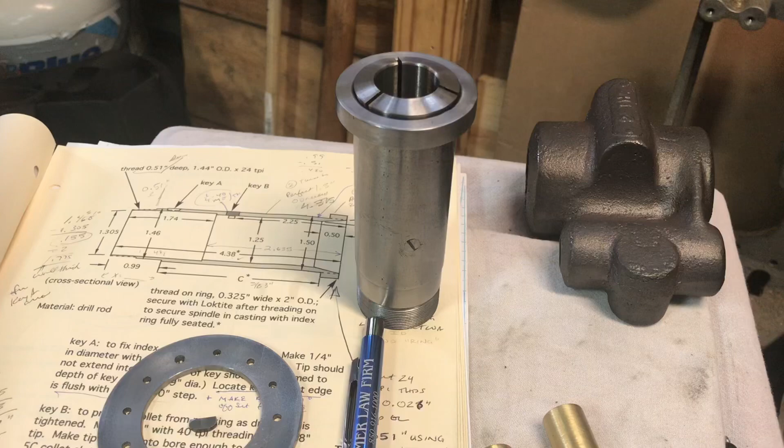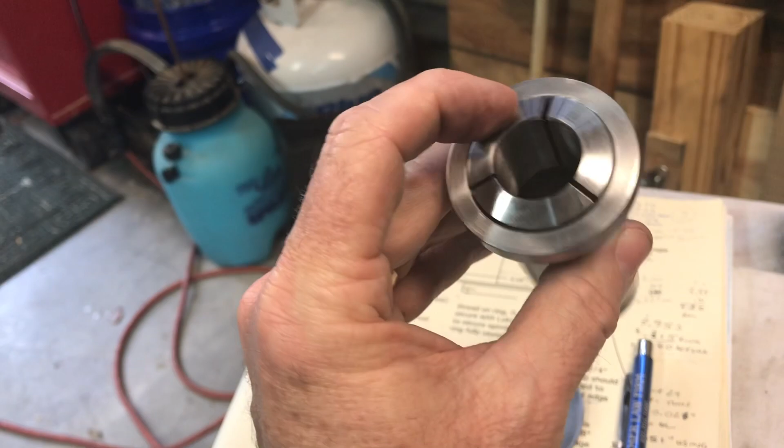Here is the 5C collet or tool holder spindle. I've spent the better part of a week working on this and some other pieces. The rest of this video will be focused on making the spindle. I wanted to show the finished product. Here I've got a 7/8 inch 5C collet in place there, and other things I've made this week.

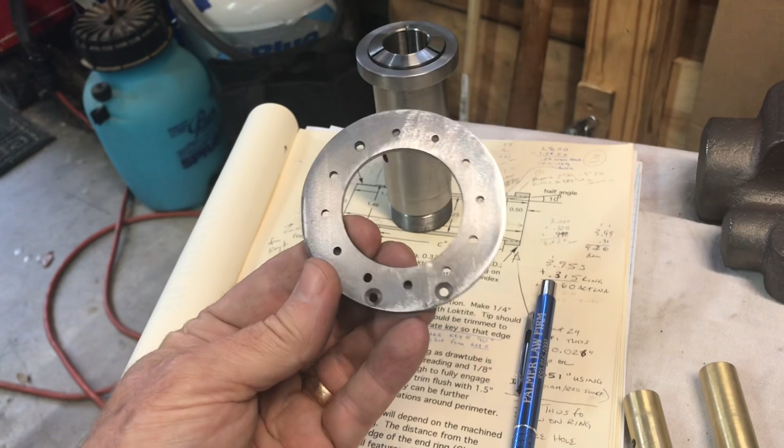Of course, I made the cotters. These are the brass stock, which will become the split cotters for the casting over there. I also made the backplate out of 1/8 inch steel, 1/8 inch thick, and it's 3 inches outside diameter, 1 3/4 inch inside diameter. That'll fit on the back of the casting.

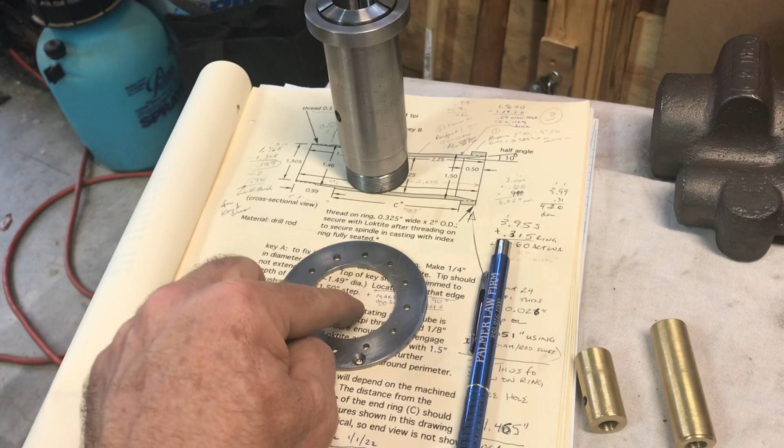I didn't make this, but I modified it. This is a little half moon key that you'll see a little bit later on. I have not fixed that in place yet. In the video, you'll see me talk about, as I get close to the end of the video, when I made last night the little screwed key, if you can see that little 1/8 inch thick key that keeps the collets from rotating.

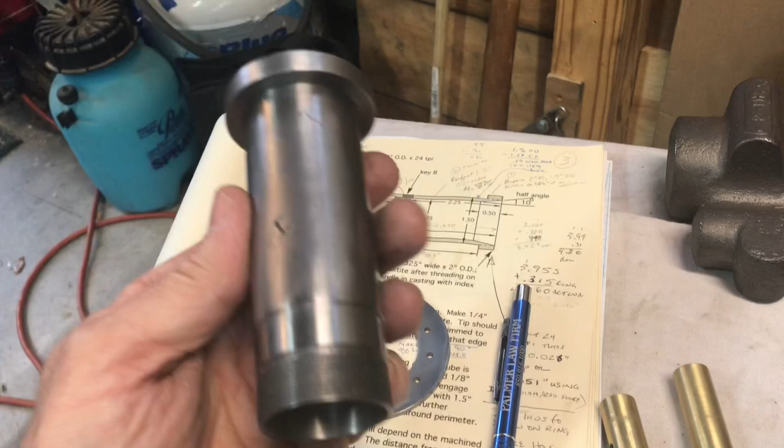During the video, I actually made 2 of these things out of brass first, but they were not a good fit, so I went ahead and remade it out of steel, and then I used my Dremel to smooth it down so that the screw doesn't stick up higher than the outside, and then I buffed it out a little bit, so that's why it looks like it does. But that's steel, and it's Loctited in place. I used red Loctite, which is strong but not crazy strong, so I'll be able to undo that with a little heat and force if I ever need to, but hopefully I won't need to. It's made out of steel, it'll stay in place.

And then also last night I Loctited on this 2-inch ring on the end, and I used green Loctite on this thing, and it is going nowhere. If you've ever used that green Loctite before, you know you have to heat stuff up super hot and use a good amount of force to undo it. So it's pretty much a solid piece right now. Really happy with the way the spindle came out. It's a good fit on 5C collets, and I'm really looking forward to finishing the project.

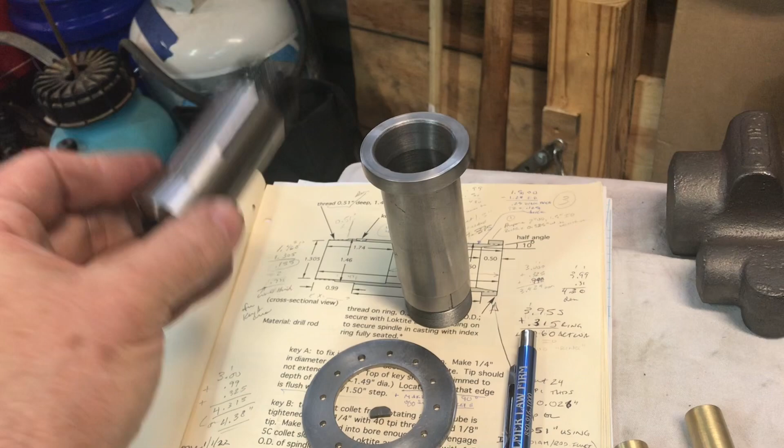But stay tuned. The next 20-25 minutes will be about the making of the spindle and some of the other accessories here for the Quorn 5C tool holder.

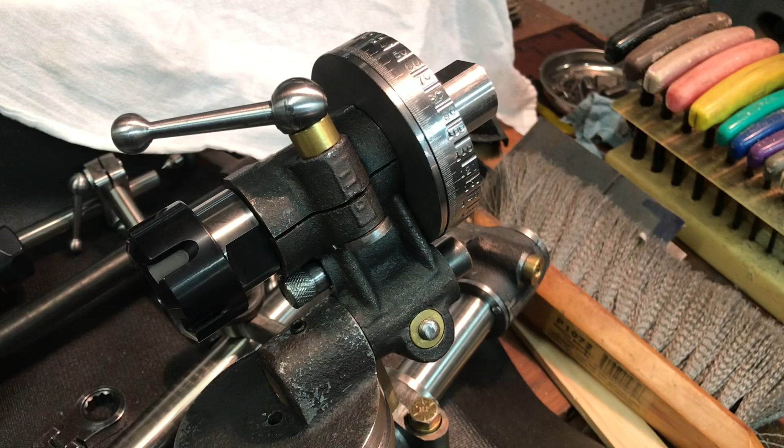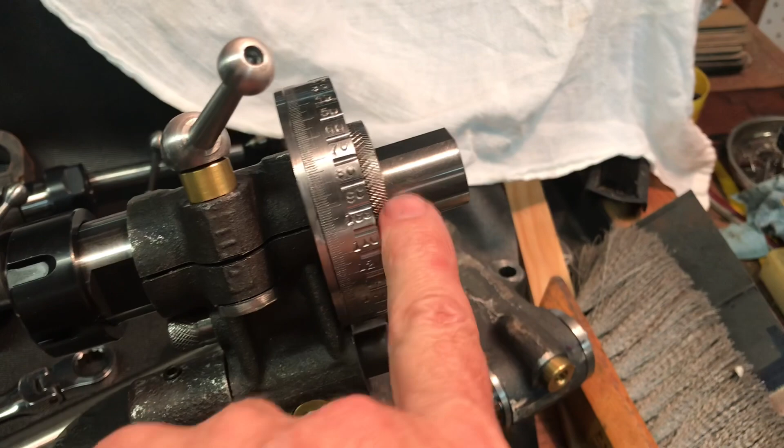Working on the Quorn tool holders. Thought I'd start with a picture of the finished tool holder for, basically, the standard size tool holder for the Quorn. I've done a complete set of videos about this, and as you can see, I've got the engraved backing plate on there, and it's all set up, and that's what it looks like. This is the one with the 25 ER collet, basically a collet spindle, if you want to describe it as that. So I did a lot of videos about this one and went through kind of excruciating detail.

So I'm about ready to machine the 5C collet chuck, or tool holders rather, and I wanted to just show this finished product and let you know that I'm going to do a video about building the 5C version, but I won't be going in quite the excruciating detail because a lot of the things are the same, and I am very glad that I went ahead and built this first because it was a good learning experience, and I think I'm ready now to tackle the 5C.

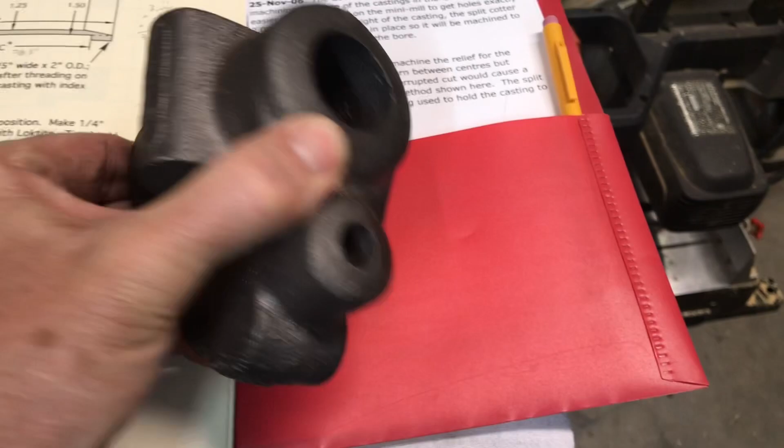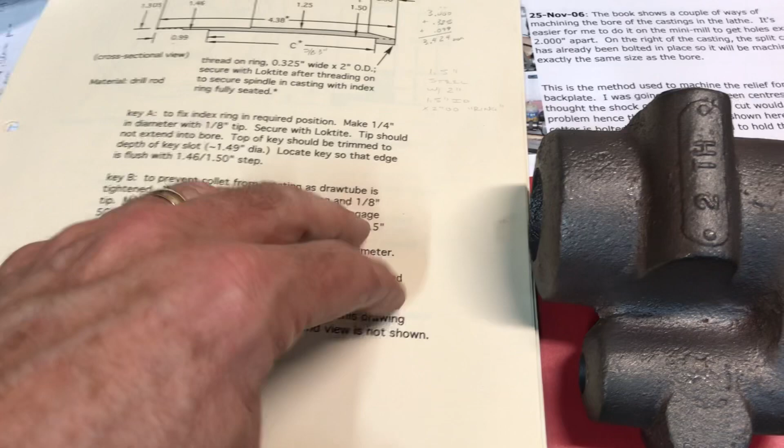And so here we have the 5C casting. I've shown this before. I got this from Gary Martin at Martin Model and Pattern, and it is a beautiful piece of cast iron, very similar to the beautiful castings that were in the pillar tool. Somebody on the Quorn group commented about the instructions that come with the large tool holder, and I wanted to show that real quick. I'm not going to show every detail, but Gary provides instructions and drawings.

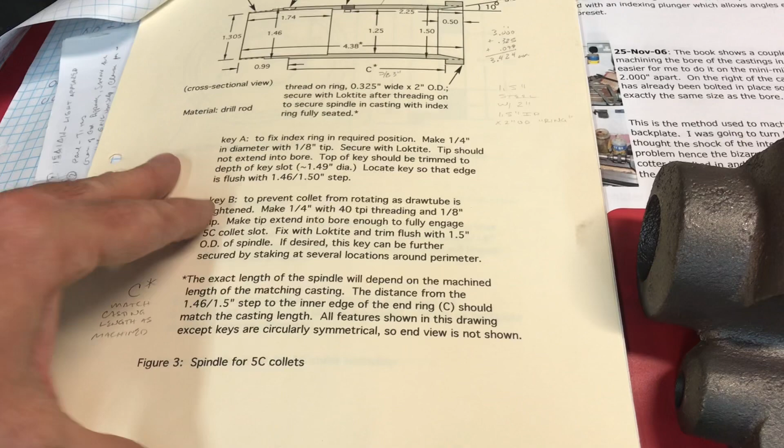These are created by Tom Hammond, who I think is the gentleman who actually originally designed the large tool holder. So he sends you the ones, and now these are the sketches for the R8. And so in order to do the 5C, I downloaded the 5C drawings from the Quorn group, groups.io. There's a Quorn group, and the plans are on there in the file section, I believe. So to answer that question, you don't get the 5C from Gary, but you can download them easily.

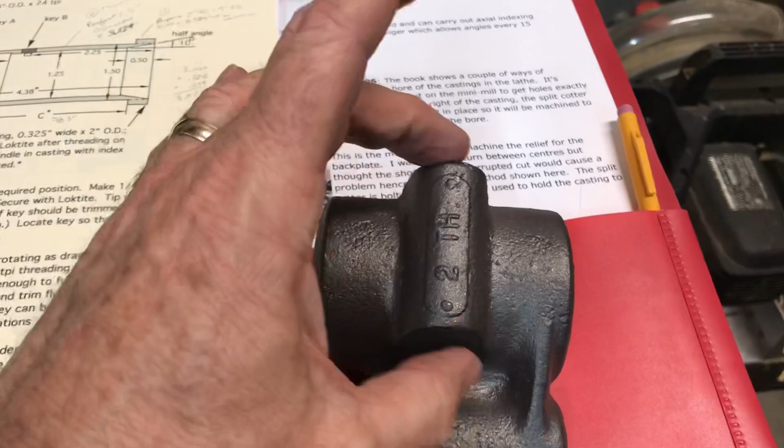So I'll get started. I think the first thing I'm going to do is make, and this is a little bit of a difference, I'm not going to split this casting like I did the standard tool holder. I'm going to make a cotter, a split cotter, that's going to go in here out of 5/8 inch brass, and then one for the bottom. So tonight I'm just going to make up my cotter blanks.

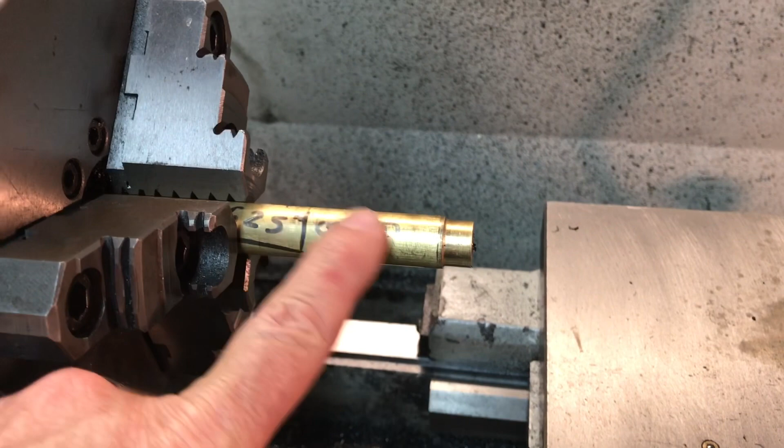Here's the cotter blank material. I'm not going to show the whole process, but basically I'm starting with 5/8 inch brass. I'll just cut off this little nub here, drill it, tap it 5/16-24. One piece is going to be about 1.25 inches long, the other one is going to be about 2 1/8.

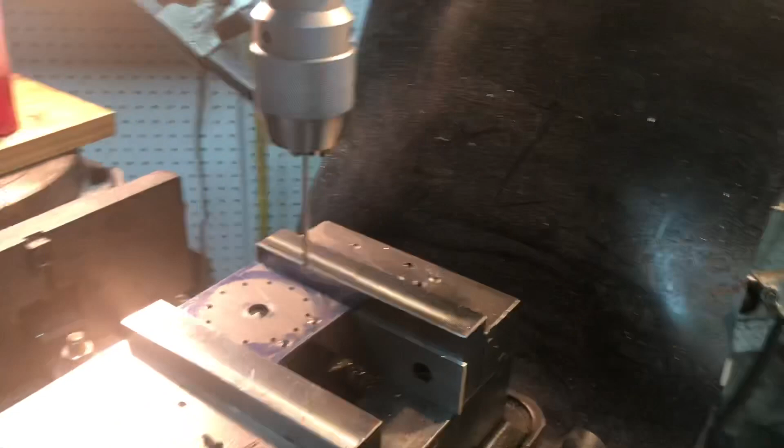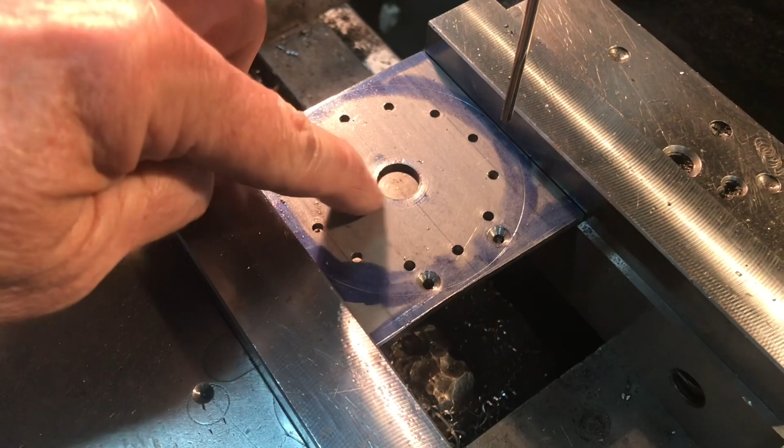Here's the one thing I did differently for the 5C tool holder. I've drilled and reamed, I'm just finishing the last hole now, reaming it. All these, the 12 holes, are basically the degree holes. I decided to drill and ream all of them in the mill, so what I've done here, I made a 1/2 inch hole for an arbor, and I'll be extremely careful with that. So I'll put that on the arbor and then turn it around, and then I'll be able to put it back in a 3-jaw chuck and open the opening up to the 1 3/4 interior diameter.

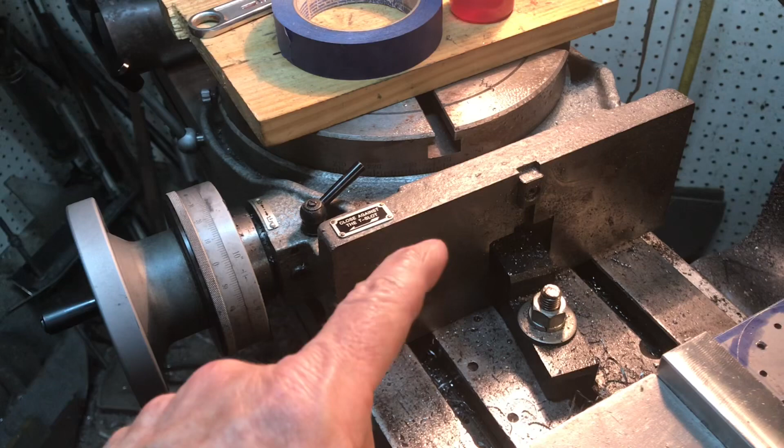But I really like using the pitch circle diameter function on my DRO, and I thought this would be a good time to try that out. I have the rotary table, I can do it on there, but I thought this would be a good place for it. The other one didn't have the 12 holes on this thin piece of steel. The conventional tool holder has those holes in basically what they call the index plate, what I call the hand wheel. So that's a little bit easier to grab onto when it's inside in the rotary table. A thin piece of 1/8 inch steel, I thought it'd be best to do it this way.

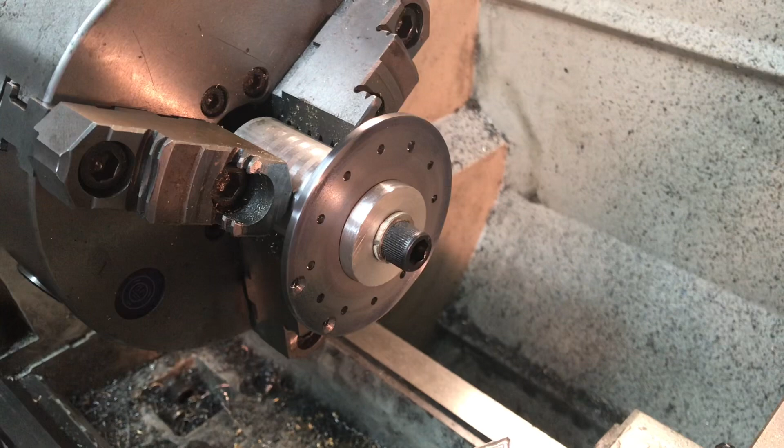Something I did a little differently on this one, since I made the holes already, I was very careful. I made a special, very accurate arbor to put this on. I'll show you that in just a second, so I could get the perfect 3-inch outside diameter.

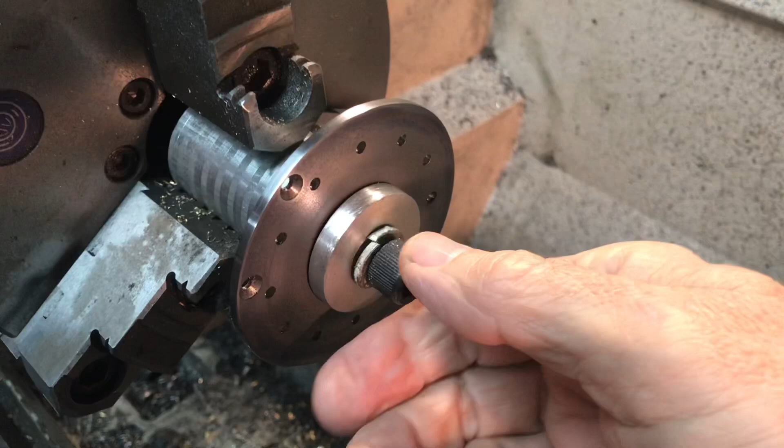So here's the index plate for the 5C tool holder, and I had an arbor that I had made for something else before, but if you noticed, I bored the inside to a 1/2 inch here when I made the plate initially, and so what I did was I set my arbor in the lathe and I turned it down to a 1/2 inch so it would fit that hole perfectly, and then I fit it on there. I just kept turning it so it was exact with no slop, no wiggle, a nice tight fit, so I was assured of concentricity probably within a few thou for the plate here.

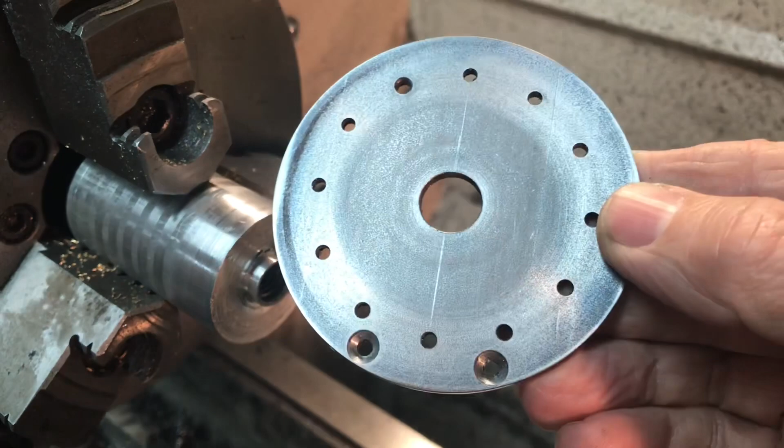So I turned the outside diameter to 3 inches, and you can see it came up nice, worked out really nice, just perfectly actually for the offset for those flathead countersunk holes. So the next thing I need to do is turn it, or place it carefully, and then bore out the inside diameter to 1 3/4.

And here I am using some magnets to set this up in the 3-jaw, so I'll have room in the back for the large bore. This is just the initial setup. Magnets are really handy, and I'll be checking it, tapping it, and all with my indicators in a second.

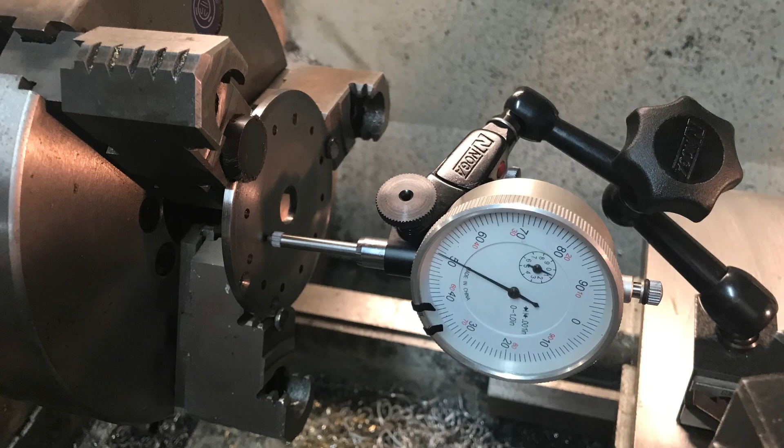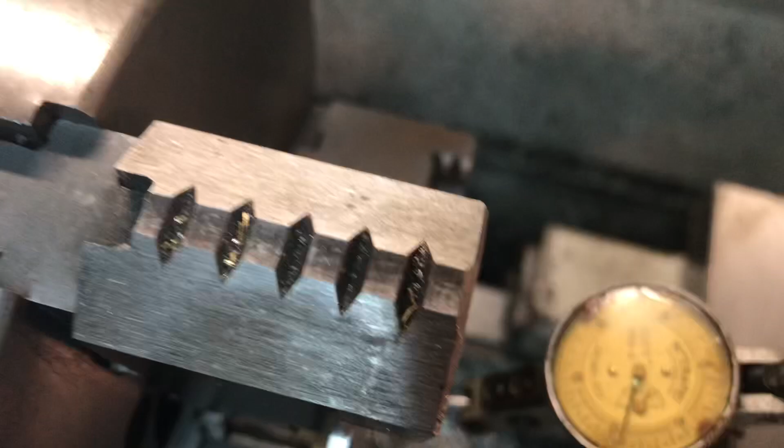Back to the index plate and the careful setup. A minute ago, I'll probably insert a still photo, I used a different indicator to make sure that the plate was flat along this axis. Now I've got an indicator inside there. This is a little Interapid test indicator to make sure that I'm concentric, and as you can see, it's just a little bobble of the arrow there. I'm really happy about that. Definitely within half a thou concentric with the center circle. That will pay off dividends in the final tool holder.

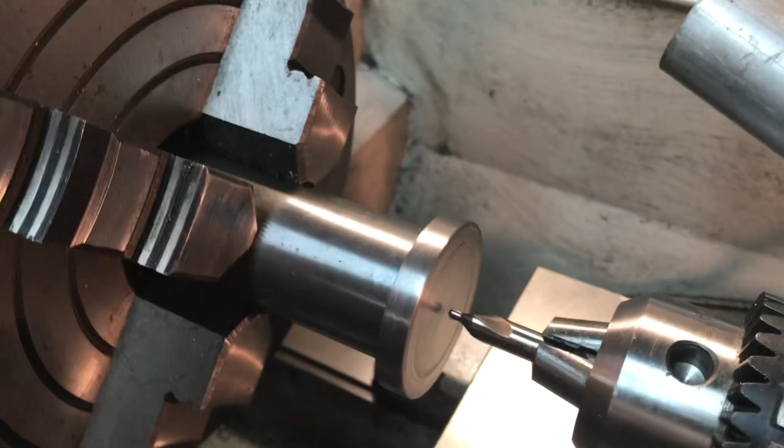Here we're making the spindle for the 5C collet. I've got a piece of 1.5 inch steel that I've polished the outside of, and I just threaded it on the outside for the 1.5 inch 24 threads, and it worked out good. And I put this on by hand, the little ring, the 2-inch ring. I haven't even Loctited it in place yet, but I can't get it off because I faced off the end again, and it is solidly on there. So I'm about to start drilling and boring the center of the spindle out to 1.25 inches through the whole thing.

Last night I bored the 5C spindle out. I drilled it out to 1 inch. Now I'm using my awesome Grizzly. This is my 3/4 inch boring bar. I use this thing for the cylinders on the locomotive. I've used it for a couple of other projects. It's really good. It's really effective. Gives a great finish. I'll show that when I'm done. Basically, using the DRO, taking off about 30 thou at a time. Just got to open this up to 1.25 inches inside. I drilled it out to 1 inch. Now I'm opening it up the final 1/4 inch, 250 thou.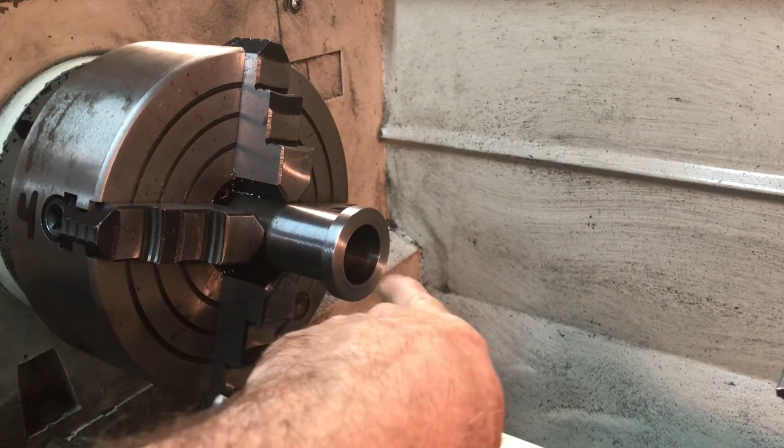The next step will be to put the 10-degree angle cut. I'll probably do that tomorrow, so I can fit the 5C collet. Let me show you, in case you're having trouble visualizing what I'm doing here. Here's a 5C collet going inside, and the 10-degree angle cut gives the closing mechanism, clamping mechanism, whatever you want to call it, for the collets that go in there. So that'll be next before I can take this off and flip it around. I'll probably take the ring off. Not quite sure about that yet, but I'm thinking I'll take that off before I remove this and flip it around.

The rest of the design is actually the back part gets bored out slightly wider so that it fits the clamping nut that goes on to the back of the 5C collet and pulls the tension. And then there's a couple of other details in here, some keys that get put in. There's a key for the slot here in the collet, and there's a key in the back to key the index plate, I call it the hand wheel, to key the hand wheel to the spindle. So I'll show more of that as we go on.

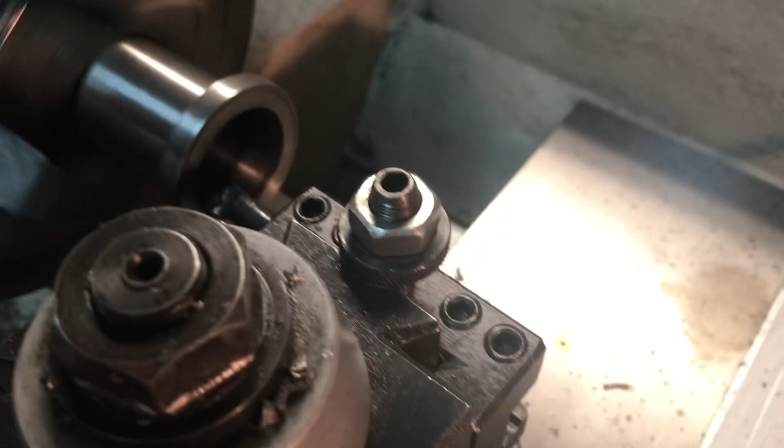Here I am cutting the taper for the 5C. It's a 10-degree angle, and it's not a surprising setup in any regard. I would just point out that I'm taking very light cuts and taking it very slowly, as you can see. About halfway through the angle, I've got a little 5C collet set right here that I just checked it with a minute ago, and I took a break and stopped it. Nothing really remarkable about this process.

Just be careful with your setup, with both the angle and the cutting tool. Make sure you've got good clearance all around. I'm just using a little boring tool and set up so that I have minimal overhang and going really slowly. I'm using about 230 RPM on the lathe. You can go faster than that, but this seems to be making a nice cut. I'll bring you back when I get a little closer.

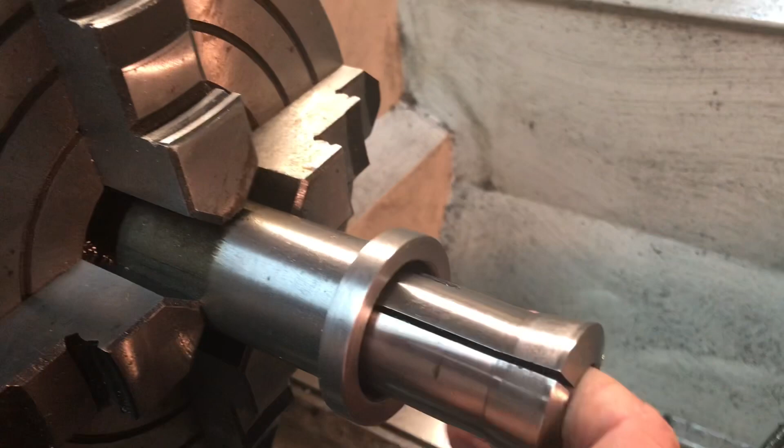Alright, so I finished boring out. I think I've finished as far as I'm going to go. Let me show you the fit. This is interesting. As you can see, the collet does not get quote-unquote sucked all the way in to the hole, but I'm hesitant to cut it any deeper because I'll be cutting into the rim of the tube that we've just machined here. I know that for a fact because as I was machining the last cut, which was

only a 20 thou cut, it threw up a wire, so to speak. A piece of wire came loose that must have been a piece of the former rim of the inside of the tube of the spindle there. And I noticed on Dan's photographs that he sent me and he published on the Quorn.io group, he's the one that revised the drawings for the 5C, his 5C collets stick out just a little bit like that too. So I don't see anything wrong with that, and it might make it easier to pull one out if it got stuck or something. So I think I'm going to call that good right there.

I do believe I'm going to have to unscrew, so I'm kind of glad I haven't Loctited this in just yet. I'm going to have to unscrew this to flip it around in the four-jaw and work the other side. But I'll bring you back for that. Just kind of wanted to show you the fit. And it is a nice finish, and I have no doubt that that'll work adequately for clamping with the cutters. So there you have it.

Just to follow up on my comment about the depth of cut and so forth, here I took the ring off. Again, I'm glad I didn't Loctite that on, because this part would have been impossible if I'd done that. Right here where my thumbnail is, that's where the little wire piece got thrown up. So I was cutting right into the very edge of the pipe, so to speak. Here, if you can see that, you can see where that broke off. Cutting right into the edge of the lip, maybe even removed about half of it. So I probably went a little bit too far actually. I'm very glad I didn't go any further.

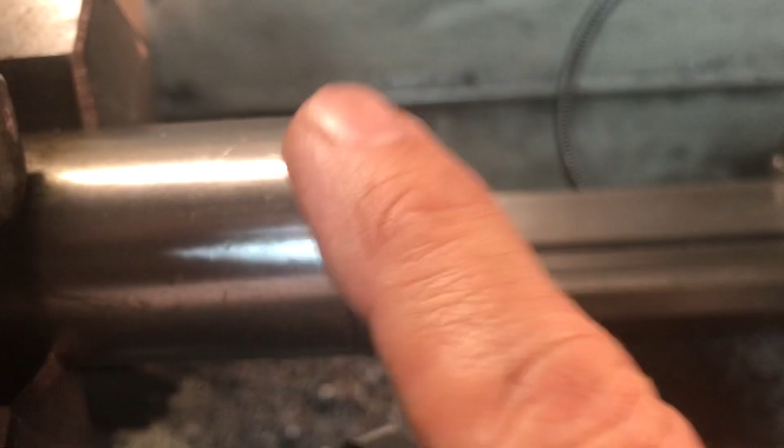But as you saw when this thing was screwed on, it made a nice smooth receptacle, so to speak, for the 5C collet. So I'm taking this off so that I can reverse it and do the machining on the back side and put the little pins and so forth in here. But I'm glad I didn't take any further out. I'll mark this as to which part is the outside so I don't forget, so that I can Loctite it back together when I get done.

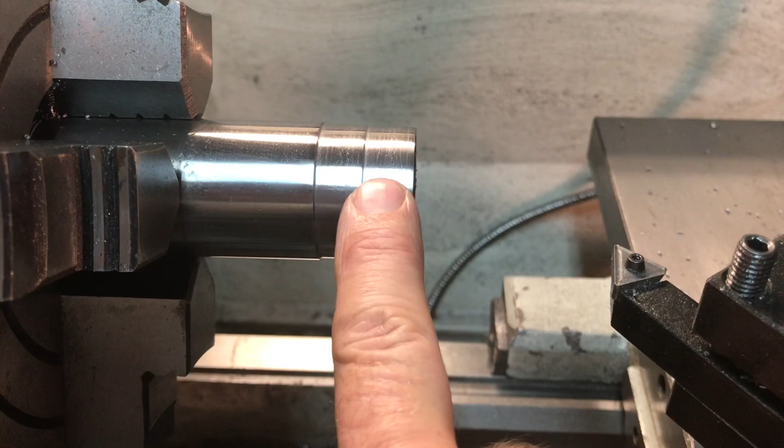Okay, back at it again. This is the spindle for the 5C collet holder, and this is the 1.5" portion. I just turned this part down to 1.460 inches and this part to 1.440 inches. So 40 thou off for here and an additional 20 thou off for here. And this part will get threaded now. So I'll be changing out the chucks, but I just finished polishing this up with a little emery cloth and I thought it looks good.

After threading, the next thing to do will be to bore out the center part in the rear here, the back 1 3/4 roughly, for the nut that will retain the 5C collet. I'll bring you back to show you that. And now the back portion is threaded there. This is just to paint the picture here. On the spindle, this part of the spindle right here is where the casting will end. So the hand wheel will go up here, and then they call it the index plate. I like to call it the hand wheel.

And then there's a retaining nut that will fit on the back part here that will hold it all together. And there's also, I'll have to put in here a couple of keyways, but I'll be working on that. I'll do that on the mill later after I've bored out the center rear portion.

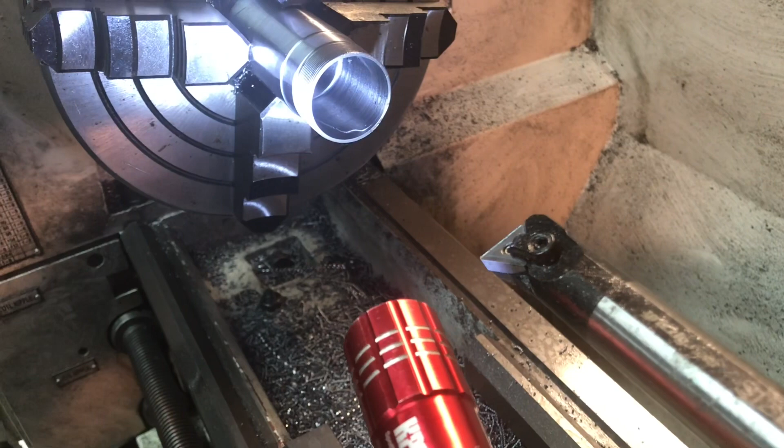And I use my big boring bar, my 3/4 inch Grizzly boring bar again, to bore out the back section to 1.305. If I get a light in there, you can see it gives a super nice finish. So 1.305 inside diameter by 1.74 inches long from the back.

Alright, show a little trick. I've showed this before, but if you have to mark things 90 degrees apart, one way you can do it, build up a little set of blocks here for one of the jaws if you're using a four-jaw. As you can see here, I've already scribed one line. This will be for the keyway that goes in and holds each collet secure.

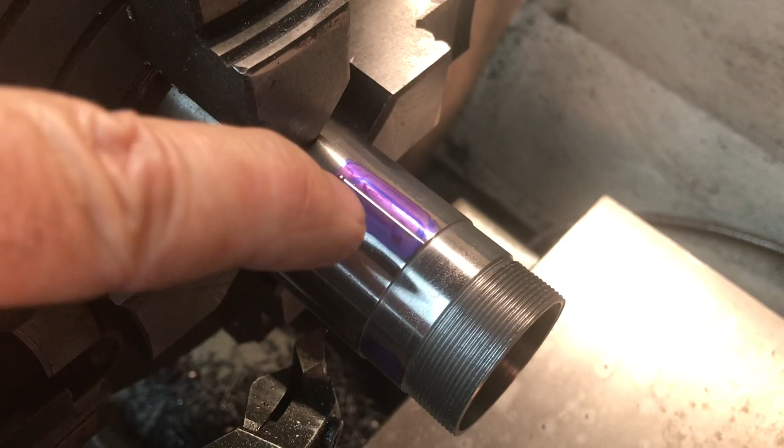I'll be drilling and tapping a 1/4-40 hole in there, and I'm getting ready to scribe a line down here for the other keyway, other key, which will be the key that engages to the hand wheel. So a little tip there for marking those things. They don't have to be 90 degrees apart. I just thought it'd look good.

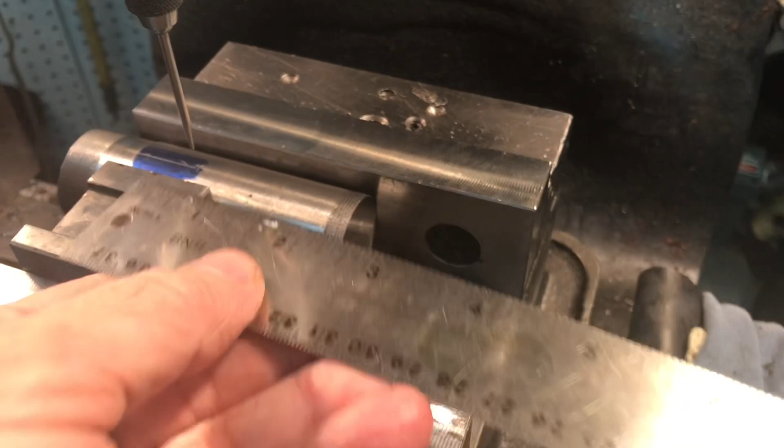And just showing the setup for drilling and tapping the hole for the keyway that will hold the slots in the 5C collets. The keyway has to be 2¼ inches back and of course on center, and it's tapped 1/4 inch 40. And happily, I just happen to have these British-made model engineer taps. You can see how fine that thread is. 1/4-40 is a very fine thread.

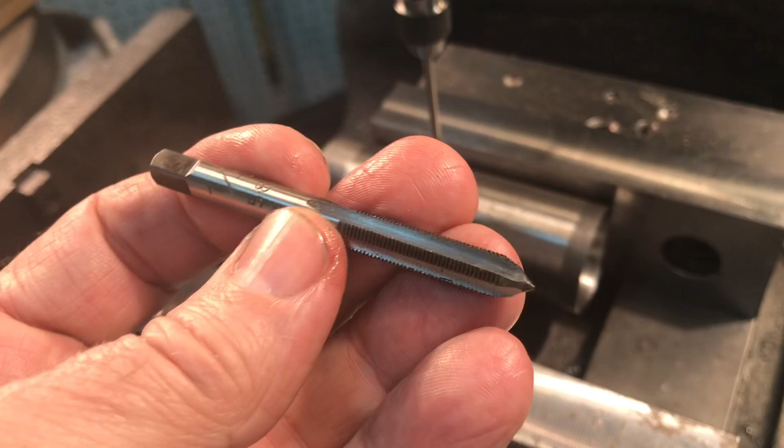I bought these taps, I believe, from a supplier in the UK. Of course it says Apex on there. I either got them from Kronos or from a supplier called Tap Die Company Inc. I think these might be from Tap Die Company, but I've used them on a few different projects. I got these for making the valves for my live steam locomotive, so very happy to have those.

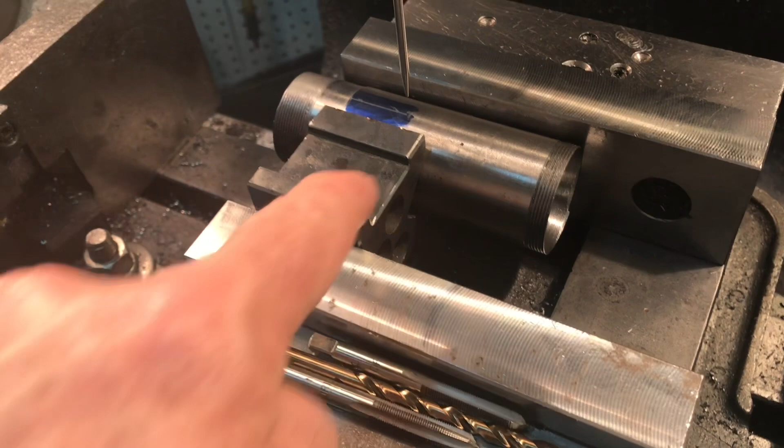And I'll be drilling and tapping this one. It says use number 5 drill for the pilot hole. So now that I've got it all lined up, I'll machine a little flat there and then use a center drill and then the number 5 drill and then tap.

Here we are finishing up milling a 3/32 inch slot for a conventional half moon key. Taking it really easy, going only like 5 thou at a time depth of cut. I'm only going about half the wall thickness. The wall thickness here is 77 thou, so I'm actually only going like 38 thou depth of cut. You can't really see that. There you go, on my DRO. So I'll take this off in a minute, clean it up, and we'll see how well the key fits.

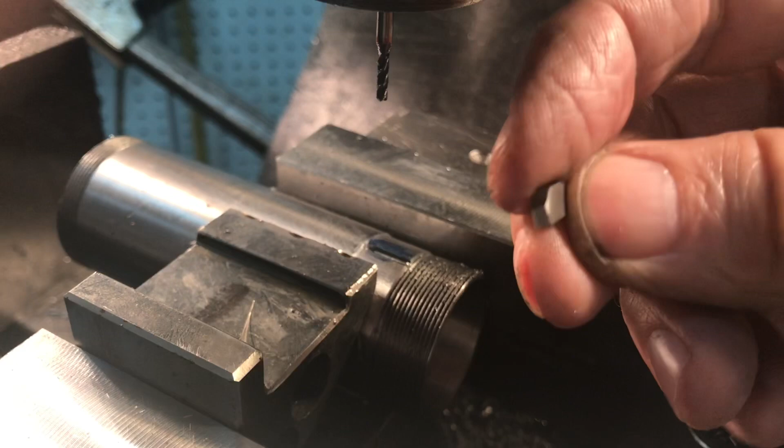There we go. Little half moon key. I ground the edges off of it a little bit, so it won't be quite as long. And like I said, this is a 3/32 inch thick one. And I got this idea from Dan Watson. Dan is the one that redrew or added to the Quorn 5C information in the quorn groups.io. And he suggested using this, so I think I'm going to do the same thing. I'll custom fit this a little bit and then Loctite that into place. I think that's going to be a good solution.

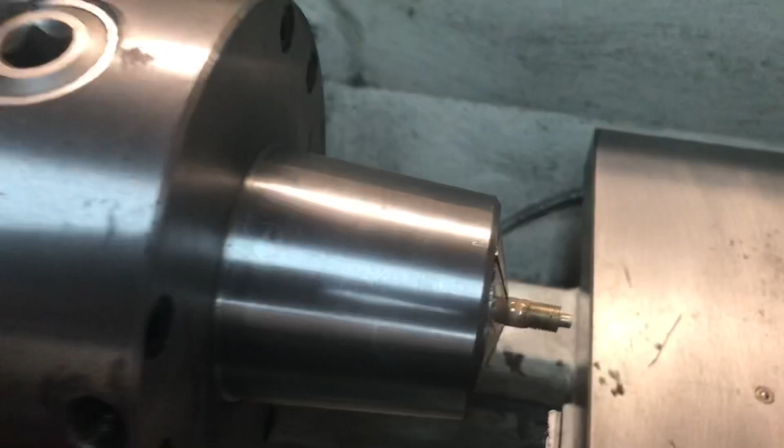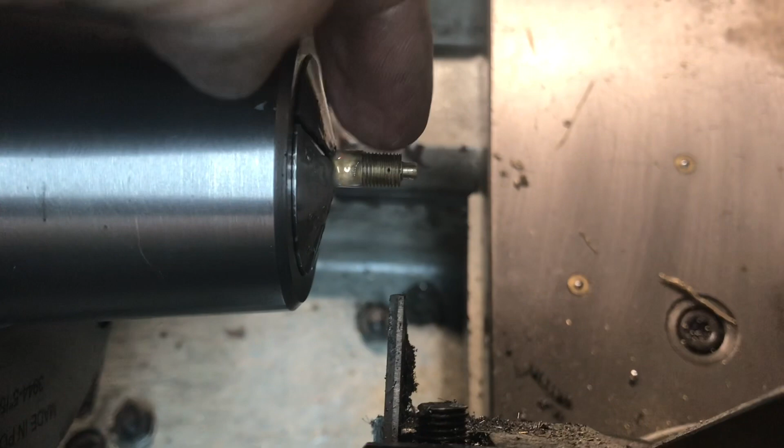I decided to make my little screw, the indexing screw for the 5C collets, out of brass. So I've turned a little 1/8 inch by 100 thou deep tip, and I just threaded 1/4 inch 40 a little section of the brass rod, and I'm about ready to cut it off, and then we'll test fit and see how it goes.

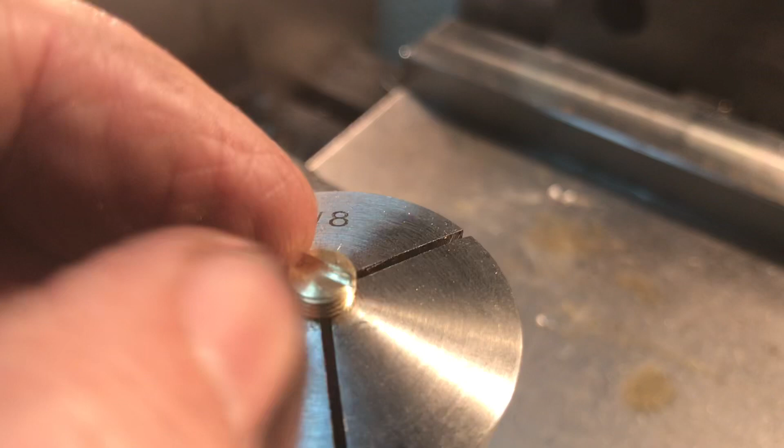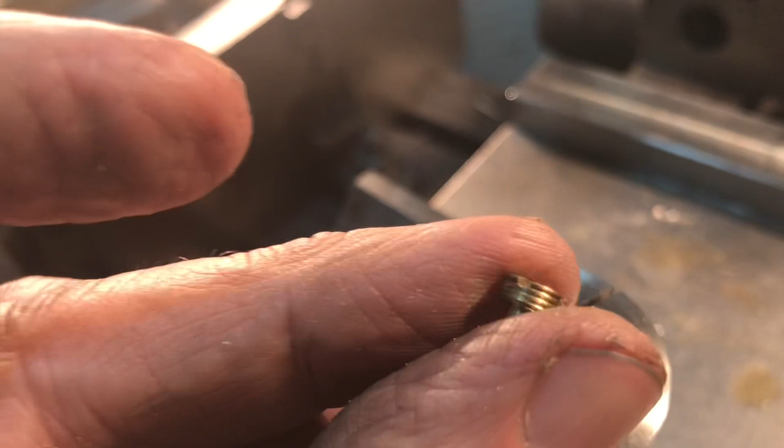And here's the finished screw. I just used the Dremel tool to cut a little screwdriver slot in there. You can see the little 1/8 inch pin, and then see if we can get that to focus, the 1/4 inch by 40 threads. So I'll try threading this into the collet holder now.